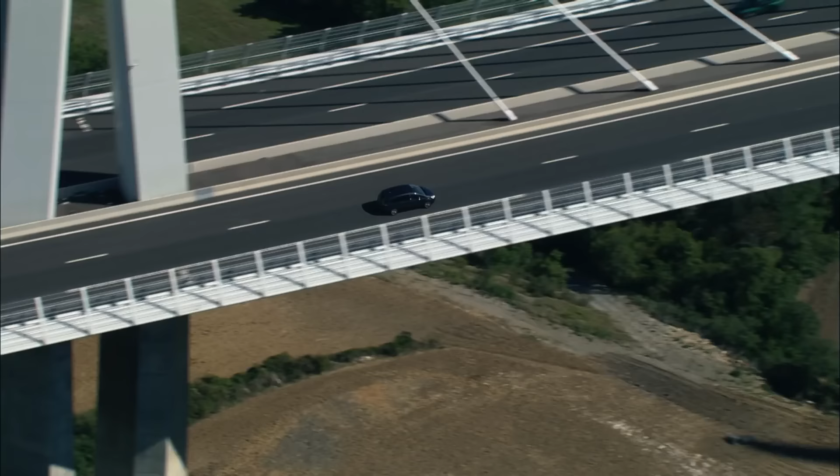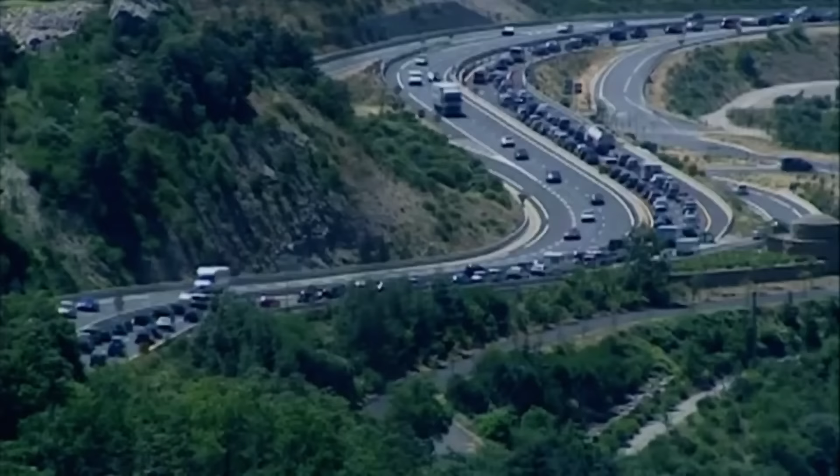Nestled in the southern corner of the Massif Central in France is the tranquil medieval town of Millau. However, for decades, every summer, that tranquility was shattered. Lying directly in the path of the fastest and busiest transport link between Paris and the Mediterranean coast, this historic town became a traffic nightmare.

Millau is not at all adapted to the motorway traffic. When the traffic from the tourists coming back from vacation in July, and the other one coming down in August, it could be necessary to have 3 hours to cross Millau.

Finding a solution would become the engineers' biggest challenge for the Millau Viaduct. To bypass the town and unblock this vital route across Europe, they would need to achieve what was previously thought impossible: build a road across the gargantuan Tarn Valley.

The first difficult point was to select where to cross the valley, because there is almost 300 meters between the plateau and the deep part of the valley. There have been big debates at the time, many alternatives were analyzed. Finally, it was decided to fly over the valley.

To achieve this extraordinary feat, engineers created a masterpiece: the Millau Viaduct.

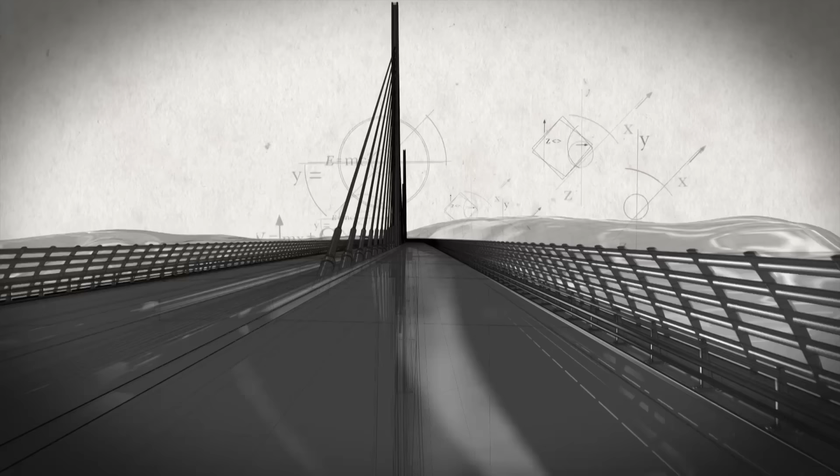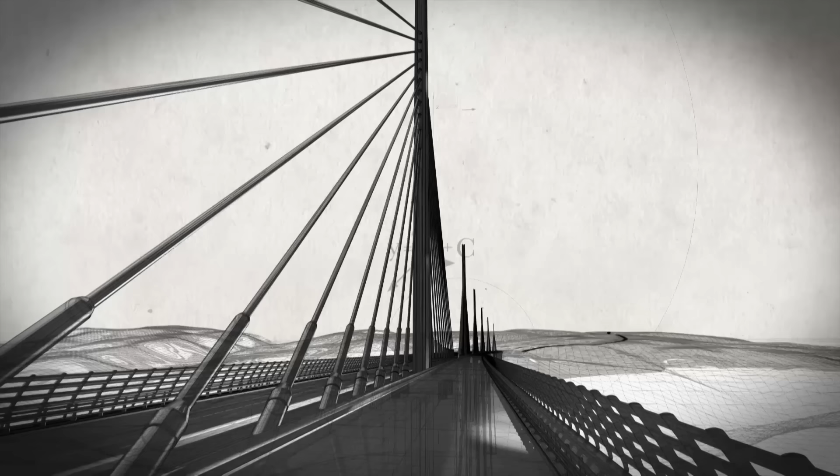Spanning a staggering 2.5 kilometers and towering 343 meters above ground, it is the tallest bridge on the planet. Touching the Tarn Valley floor only 7 times, the slender concrete piers support a 36,000-ton aerodynamic steel deck, held audaciously in place by a single row of 154 super-strength cable stays.

Completed in 2004, this magnificent sky bridge has pushed modern architecture and engineering to its limits. Many thought it was impossible to build that bridge, and there have been many controversies on the bridge type. So much controversy that in 1996, an international competition was launched to find the solution. The prize was awarded to architect Lord Norman Foster, alongside the engineers of the Millau Viaduct.

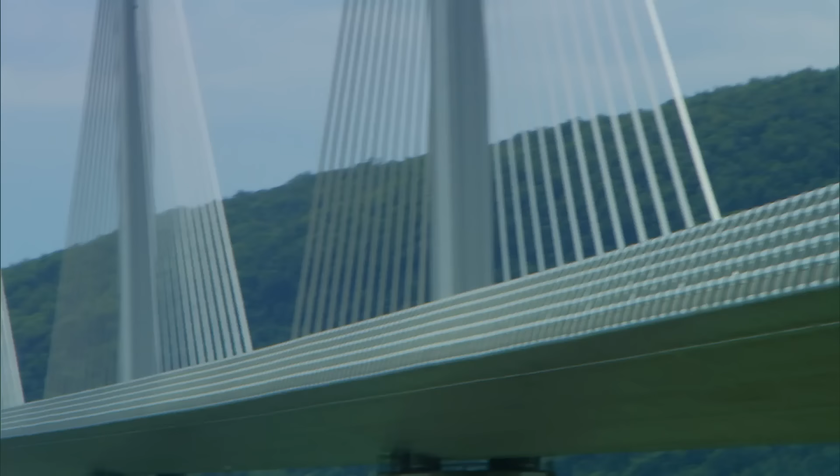Each new bridge is a new challenge, a new project, and must be designed very specifically. In this case, we had a very important series of problems to solve.

Not only did the bridge have to span one of Europe's deepest and widest valleys, but rest on an uneven valley floor and be subjected to extreme wind forces at deck height. But perhaps the biggest challenge of all, it had to be completed in less than 4 years and built to last.

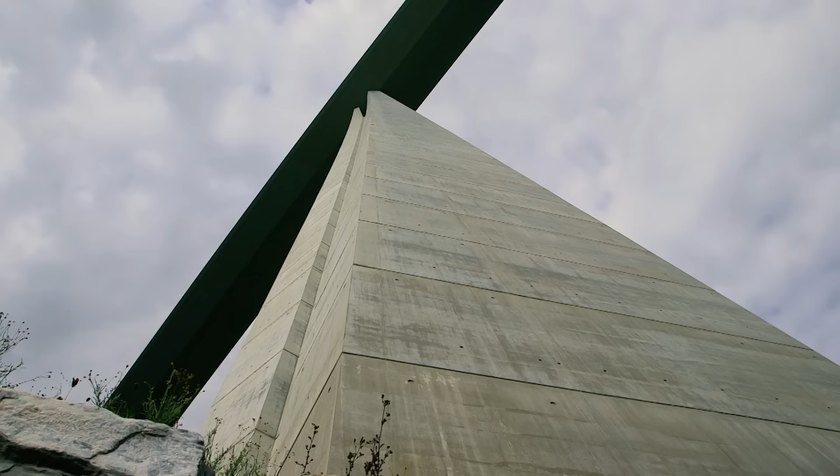What is very important is to give the durability to the bridge. The contract specifies that the lifetime of the bridge is 120 years, so it's something very important.

So how do you create such a colossal bridge of extreme strength in record time? Engineers first needed to choose the right materials, a task that would not have been possible without the great innovators of the past.

Man's earliest building materials were sourced from nature. Neanderthals built shelters from the bones and tusks of woolly mammoths, usually when the mammoth had finished with them.

For thousands of years, Mongolian nomads have used sheep wool to line the walls of their yurts. Although not everyone's happy about it.

From the time of ancient civilizations, many houses have been built with straw and clay bricks, reinforced with a touch of animal dung, which works perfectly, if you're standing in the right place.

But to create a truly enduring structure, engineers at Millau would look to the work of a pioneering British civil engineer a quarter of a millennia earlier.

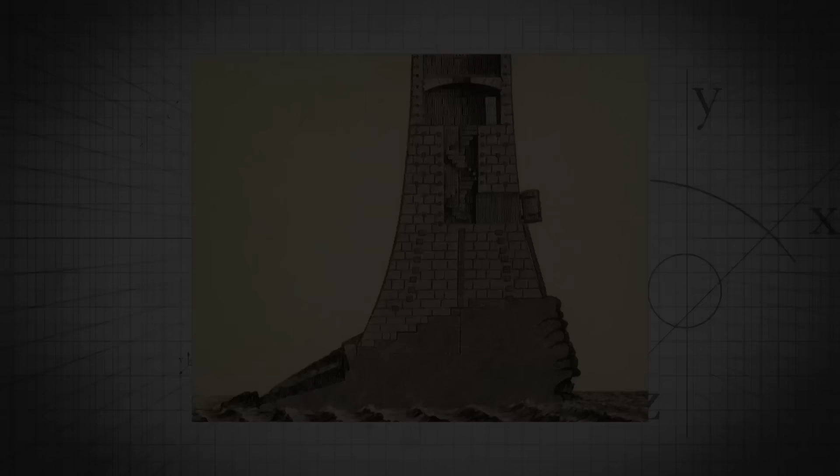In 1756, this seemingly impossible challenge fell to engineer John Smeaton. He believed that the sea must give way to the building, and decided to build a lighthouse made of stone. But it was how he joined the stones together that was truly revolutionary, and earned him the title father of civil engineering. Smeaton's original lighthouse stood on this spot for over 120 years, and we can still see the bottom half of it as that stump of a lighthouse over there. The structure had been so strong, it was only cracks in the rocks that it sat on that forced engineers to dismantle it.

And the secret of its success had been an innovative bonding material that could survive the constant pounding of the sea. Smeaton experimented with mixtures of lime, clay, and iron slag to create hydraulic lime.

I'm going to try to demonstrate the innovation that Smeaton accomplished at the tower. Here we have a traditional cob mortar, a mixture of sand, clay, straw, lime and a bit of earth. These types of mortars were used traditionally for many hundreds and thousands of years. The other material I have here is Smeaton's mixture.

Smeaton's hydraulic lime is formed inside a cardboard tube before being placed in water, replicating the rigors of the sea. I'm also going to do the same with the traditional earth mixture. Got both tubes now filled with the mortar. We're going to go away for about half an hour, and then come back and hopefully see a pretty dramatic difference in terms of how they've performed.

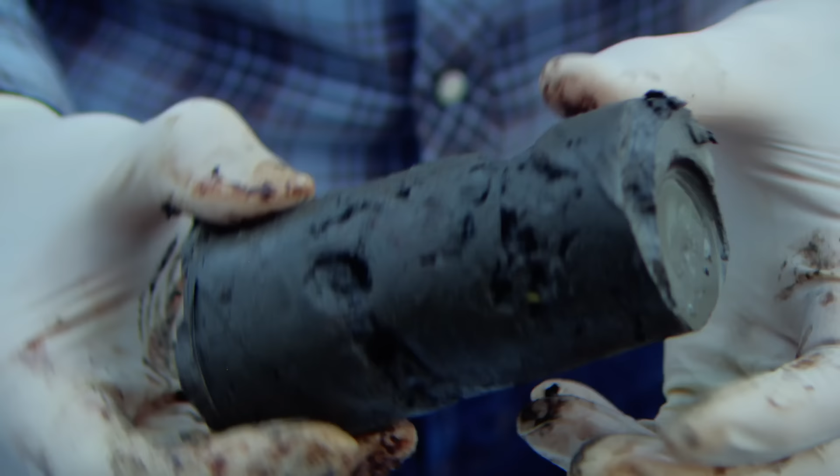What Smeaton had created was the precursor to Portland cement. Portland cement is the key ingredient in all modern concrete.

The strength of Smeaton's hydraulic lime allowed engineers to dovetail together nearly 1,500 blocks of granite, creating a rock-solid structure that would stand up against the forces of nature. So solid, in fact, the Victorians found it too difficult to dismantle the base when it was finally relocated to Plymouth Hoe over 100 years ago.

So here we have the original 250-year-old granite blocks reassembled here on Plymouth Hoe with mortar, much like the original. Incredible that it still looks so good. And if I look really carefully, way out there on the horizon, I can just see the base of Smeaton's original tower standing next to the new tower. This was really the game changer in concrete engineering worldwide.

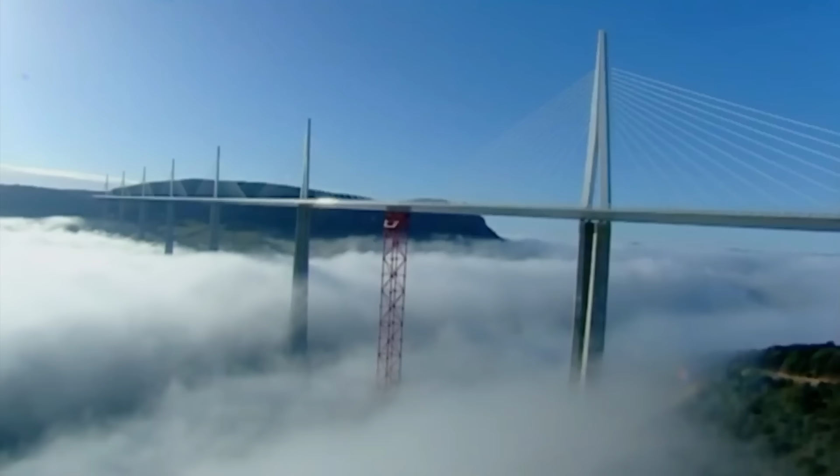At the Millau Viaduct, engineers enhanced Smeaton's groundbreaking formula to create a technically sophisticated form of modern concrete and used it on a gigantic scale, building 7 of the tallest bridge piers on Earth. All the piers represent something like 90,000 cubic meters, or more than 200,000 tons of concrete. And this is a concrete of very high strength.

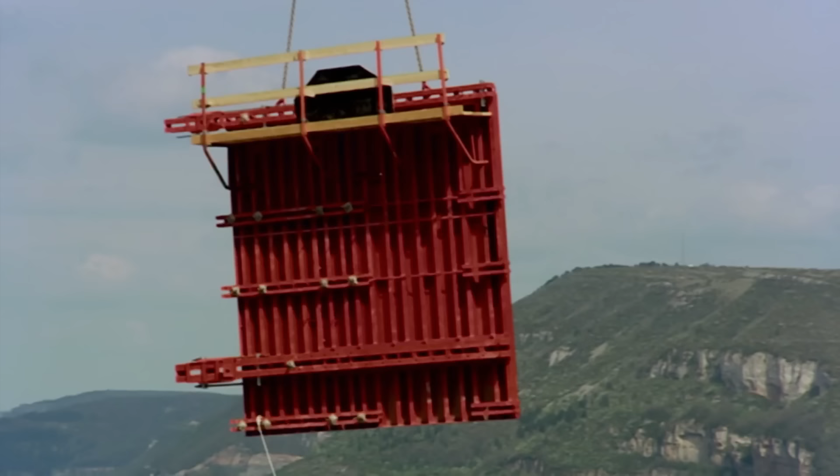But for the Chief Engineer of the Millau Viaduct to hit the 4-year deadline and avoid fines of up to $30,000 per day, each pier had to be built simultaneously at 7 individual work sites. Due to their extreme height and complex shape, radical engineering techniques were called for. From here we can see the shapes of the piers — they look very simple, but it's very far from it.

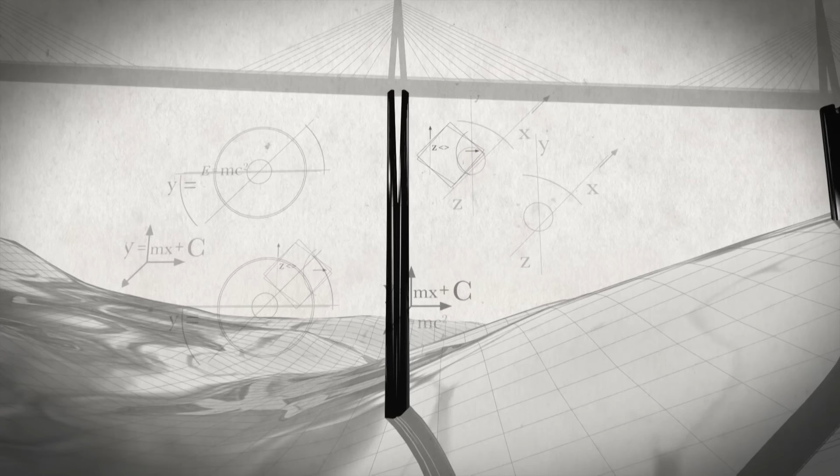Engineers broke ground in October 2001. Across the uneven valley floor, each pier had to be a different height, the tallest a record-breaking 245 meters. Their octagonal shape tapers gradually, splitting 90 meters below deck height to provide greater flexibility.

It was necessary that the architect worked to make nice piers, but at the same time, it was necessary to select shapes which could be erected with self-climbing forms.

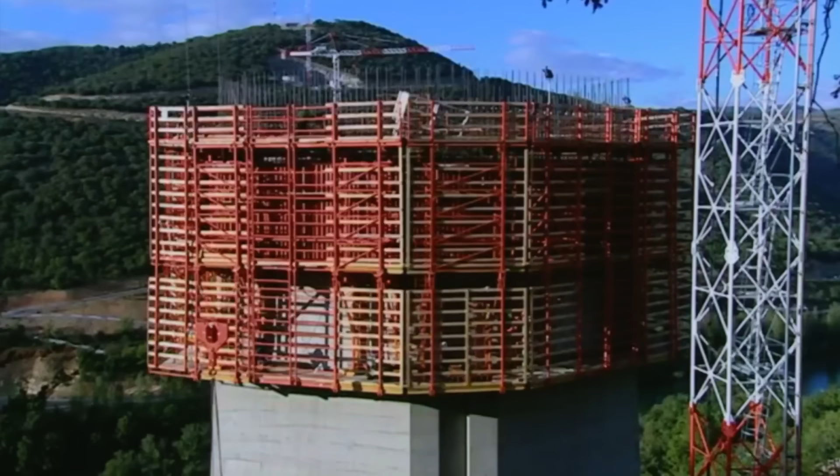Built in 4-meter stages, engineers used a state-of-the-art self-climbing frame, a hydraulic-driven system that would push a giant reinforced concrete mold upwards. One of the big problems was to lift concrete, because this pier is 245 meters high. Cranes were used to lift buckets of concrete, which was then poured into the concrete mold.

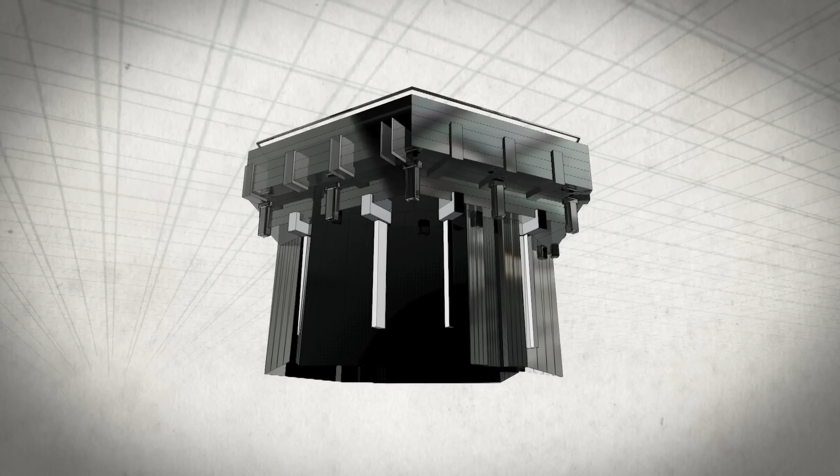After each pour was set, the mold was dismantled. The frame carrying the mold was then mechanically pushed by hydraulic jacks up the piers and re-anchored in the set concrete. The mold was then reassembled, ready for the next pour. In total, each cycle took 3 days.

You can see the lines between the different concrete lifts, and also the traces of the elements where the climbing forms could be anchored to the concrete.

The piers were completed in just over two years, one month ahead of schedule. Developing solutions to erect the seven piers in the same time was a very, very big adventure.

But to complete the planet's tallest bridge on time, designers would again look to history's great innovators.

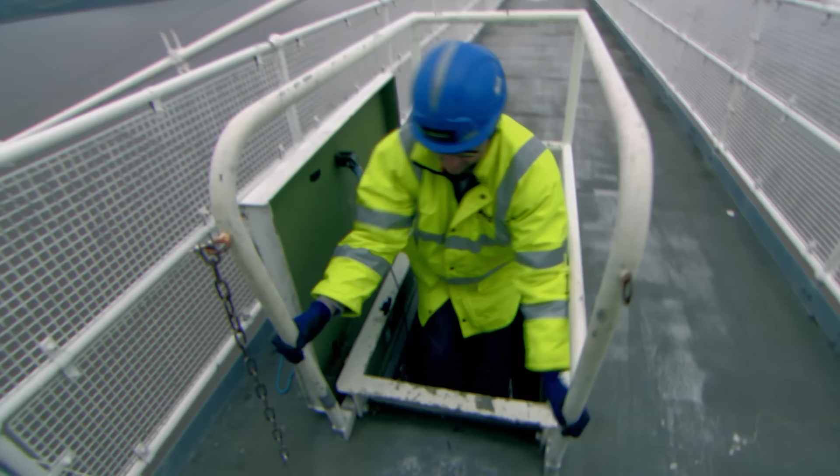The Millau Viaduct in southwest France is an engineering wonder of the modern world. When it was decided to place the structure to the west of Millau, it was necessary to design a very big bridge to cross the valley.

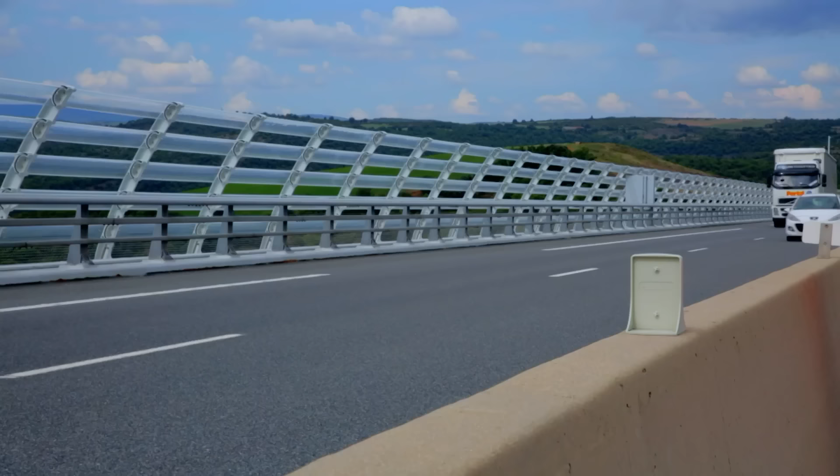Spanning the yawning abyss of the Tarn Valley at 343 meters high, this supersized bridge stands taller than any other on Earth. But during its construction, its jaw-dropping height created a seemingly impossible challenge for the chief engineer of the Millau Viaduct.

The solution is to reduce the wind force. But diminishing the effects of the wind's tremendous power on the bridge deck would not have been possible without another ingenious innovation from the past.

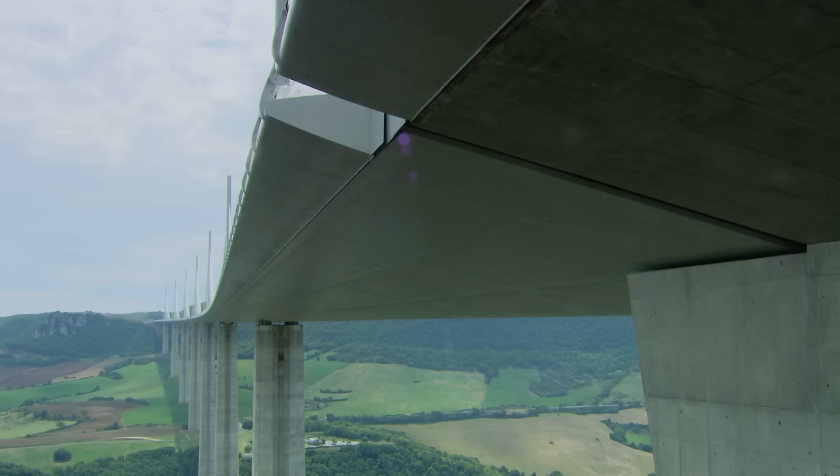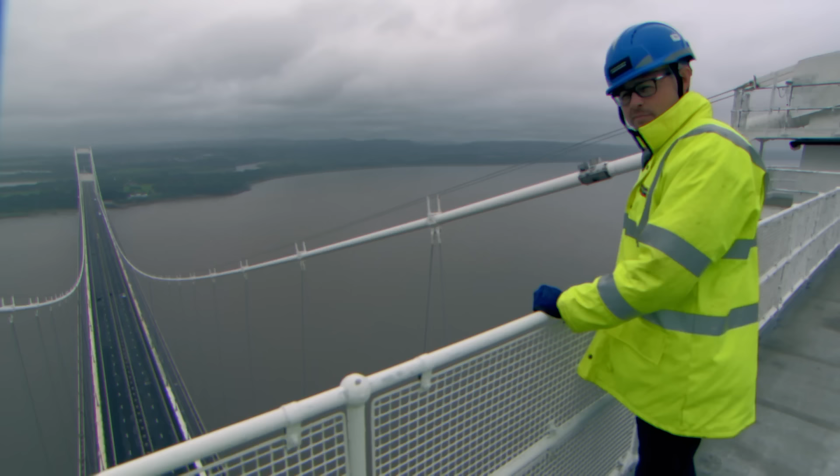Professor Luke Bisby is exploring one of Britain's most iconic bridges. All right, now this is what I'm talking about. A vertigo-inducing 135 meters below me lies the Severn Bridge.

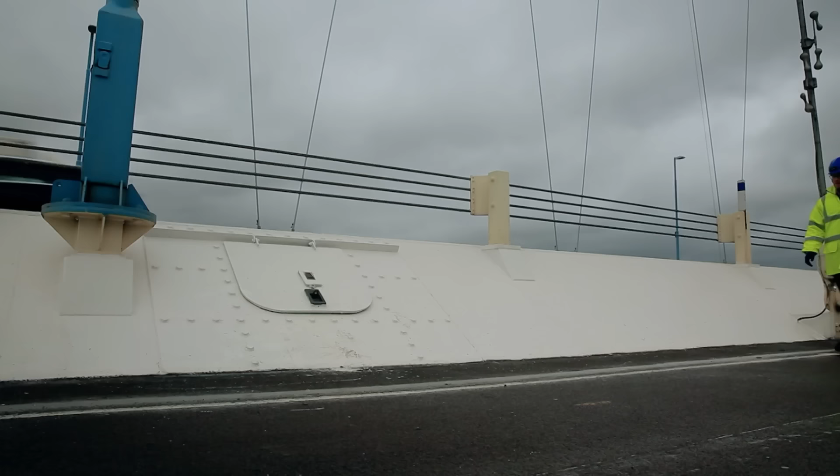Opened in 1966 and spanning the River Severn between Aust and Chepstow, it was the first major road link between England and South Wales. The main section of the bridge is over 1,598 meters long, which at the time made it the longest bridge in the world.

I can actually see through this hole about 1,000 meters down the bridge. It's absolutely incredible.

But whilst the length of the bridge was an incredible engineering challenge in its day, it was the weather that posed the greatest problem of all.

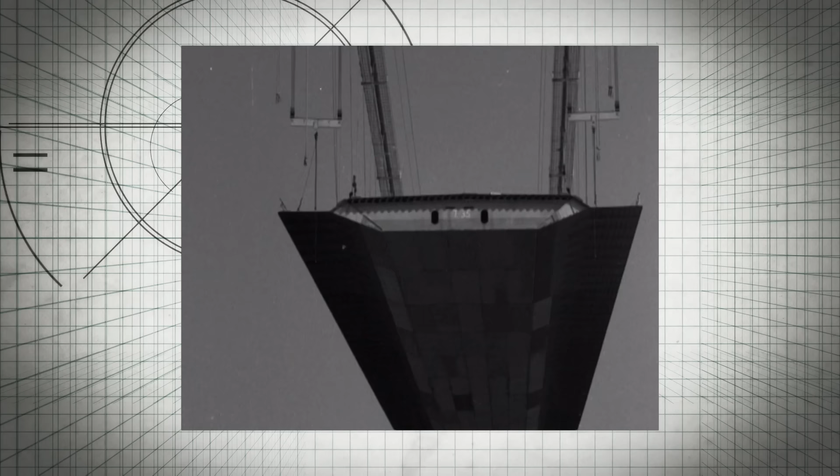Lying inland from the Atlantic Ocean, the River Severn begins where the Bristol Channel ends. The high ground of Exmoor on the south shore and the mountains of Wales on the north create a funnel for the prevailing southwesterly winds and Atlantic storms, increasing their power.

Building a bridge that could withstand severe winds was really essential. And even on a relatively calm day, standing here underneath the bridge, you really get a sense of the wind that they were up against.

During the 1950s, pioneering British civil engineer Sir Gilbert Roberts was tasked with designing the longest windproof bridge on Earth.

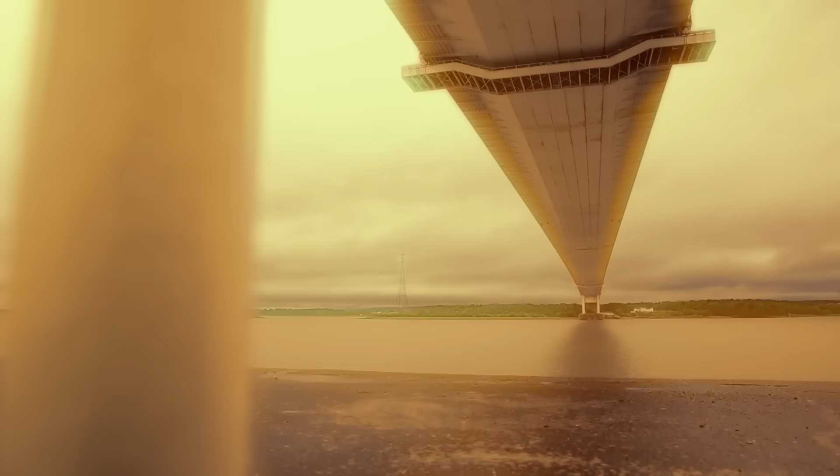And the biggest challenge was the deck itself. If you look at the shape of the deck, you can start to get a sense of what the solution was. And the most amazing thing is that the shape of this bridge deck and the solution they came up with was actually a happy mistake.

When testing the original truss lattice design in the wind tunnel, the model broke. Awaiting a replacement, engineers became inspired by other aerodynamic shapes, which led to a truly groundbreaking idea.

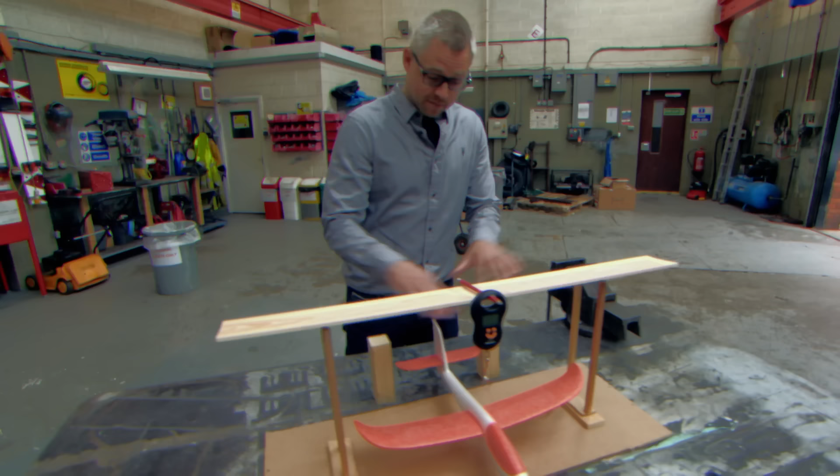So what I have here is a model airplane, and you can imagine that the wing of this airplane represents the bridge deck. A wing has a curved surface on top and a flat surface on the bottom, meaning air passing over the wing has to travel further across the top than on the bottom. As air passes over the curved surface, it speeds up and loses pressure. The pressure of the air below remains high and pushes up towards the low-pressure area, creating lift.

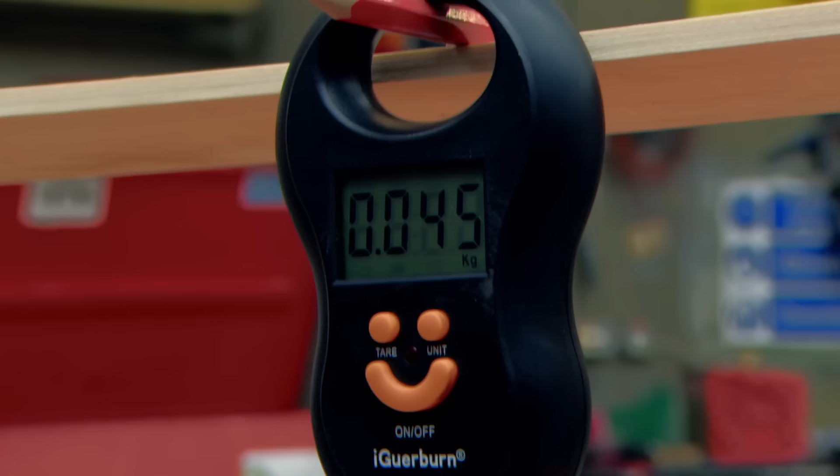What I'm going to attempt to show you is, with this hairdryer generating some wind, the force of the little model airplane will decrease, and that decrease will signify the lift force we've generated on the model. So there we have our starting weight, 45 grams. Right, so there we go.

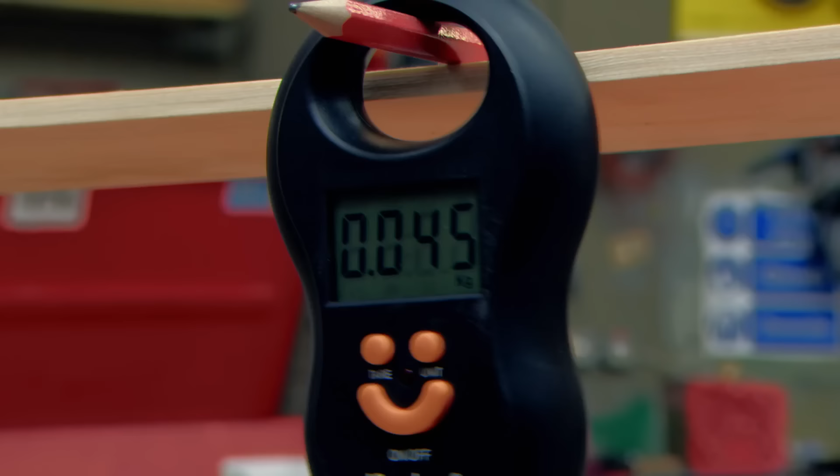The engineers here didn't want that to happen to the bridge deck. However, if the experiment's repeated in reverse, the effect for the deck is beneficial. What we should see is that this force should increase rather than decrease.

You can actually see the downward force that's coming from the wind. That holds everything nice and taut and safe in very strong winds. Now the curved surface is underneath, air loses pressure as it speeds up, and the high pressure above presses down.

And of course, this is exactly the principle that the engineers used on the Severn Bridge. Sir Gilbert Roberts and his team created an aerodynamic steel box girder deck, the first of its kind in the world. Hollow and only 3 meters deep, with a cantilevered footway on each side, the deck is able to create a wind flow which holds it firmly in place.

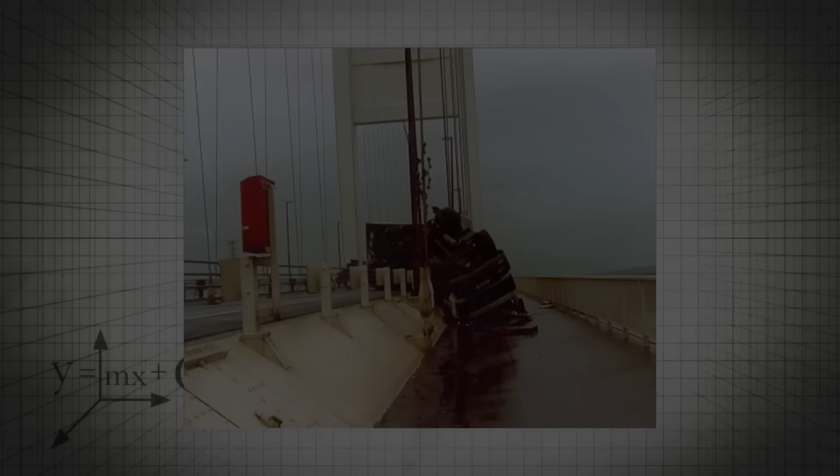During its history, 13 vehicles crossing the bridge have blown over, but the bridge itself stays solid. Although this beautiful bridge has passed on the burden of heavy traffic to its younger brother just downstream, it's still managed to carry more than 300 million vehicles since it was first constructed in 1966. And thanks to Sir Gilbert Roberts and his team, it's set to do so for many more years to come.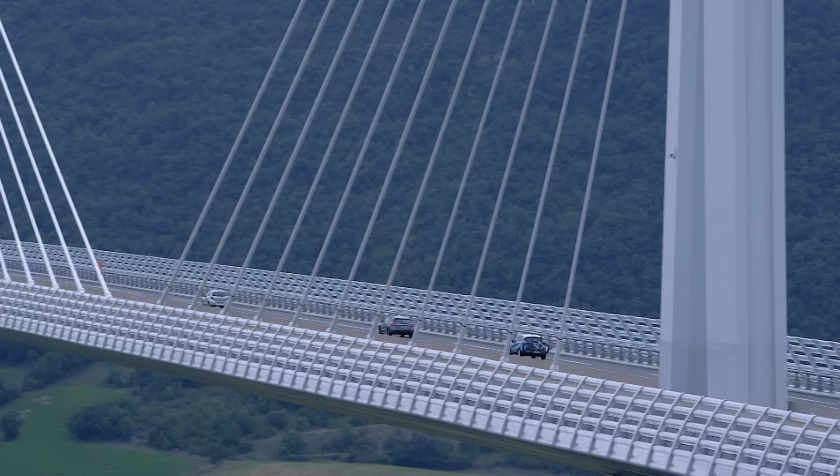Engineers at the Millau Viaduct have advanced Sir Gilbert's inspired aerodynamic shape and created a cutting-edge bridge deck of their own.

One kilometre longer than the Severn Bridge, at 2.5 kilometres and weighing a colossal 36,000 tonnes, it's one of the longest cable-stayed bridge decks on Earth.

The deck is streamlined, meaning it's rather shallow, at 4.2 meters. In addition, it has a continuous shape with very limited inclination, which helps the wind pass below and automatically reduces wind forces.

The deck is a shallow trapezoid shape, creating an inverse aerofoil to provide negative lift in strong winds.

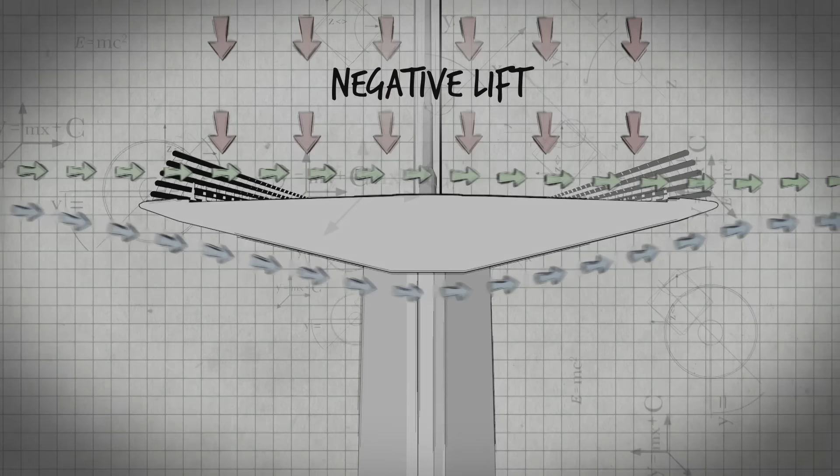But building this colossal seamless aerodynamic steel deck in record time was an unprecedented challenge. So engineers decided to create a gigantic steel jigsaw puzzle, cut in dedicated factories across France and transported to Millau.

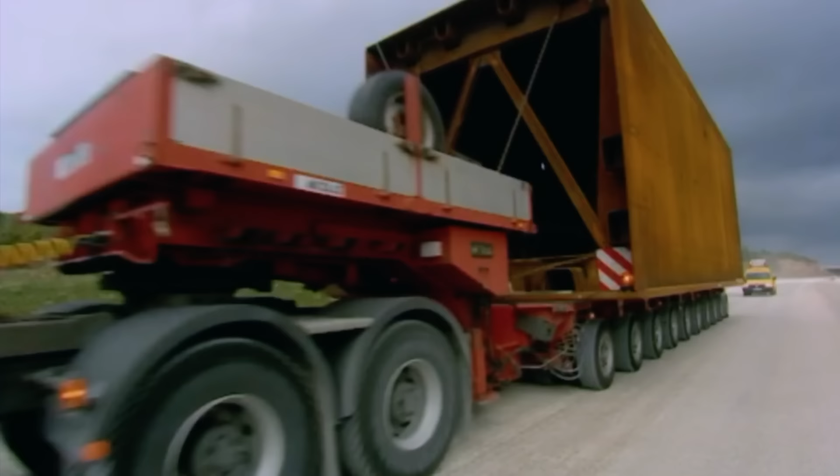The central core, which could be considered the spine of the bridge, was assembled in segments of 20 meters and brought by trucks to the site. The deck was assembled on the hills on each side.

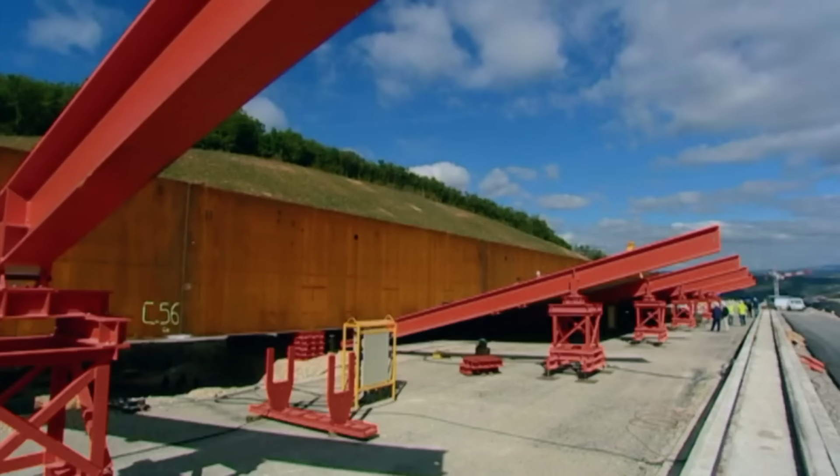Two work sites on each plateau were set up to receive the component deck parts. In all, 2,000 convoys loaded with cut steel travelled to Millau.

The welding was completed in just 20 months, using a staggering 150 tons of welding material.

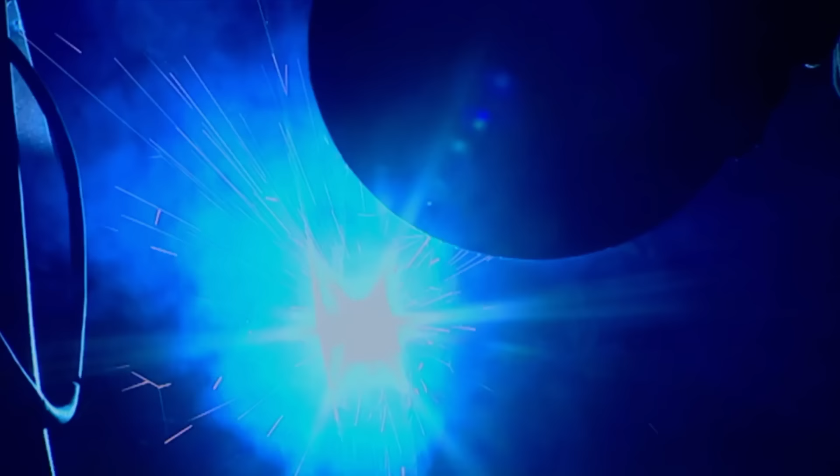But engineers at the viaduct were yet to face their greatest challenge. One of the big questions was how to launch the bridge from both sides of the valley, and it was not so simple to do that.

To span the huge chasm of the Tarn Valley, engineers would once again turn to the work of historic innovators. All of these harness the properties of a revolutionary product, to make the impossible possible.

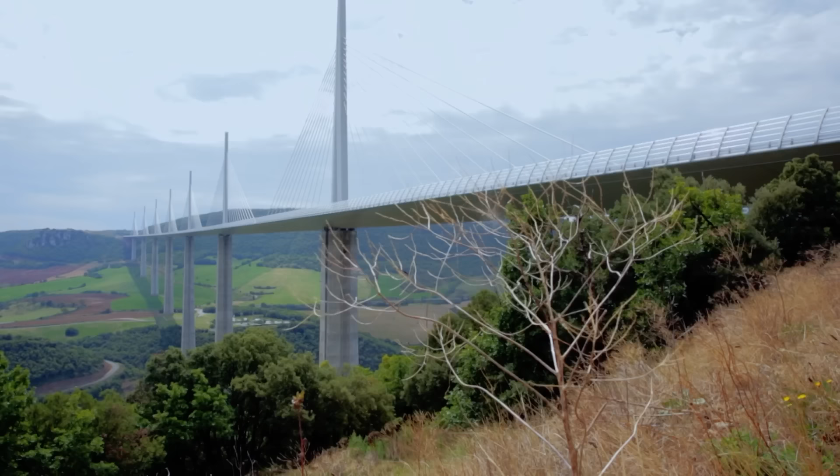The Millau Viaduct in France's Massif Central is a work of engineering virtuosity. Taller than the Eiffel Tower, this bridge once seemed an impossible dream. Conceived by the Millau Viaduct's engineer, the project pushed the boundaries of construction.

It has been very difficult. The solution was not immediate. We had to work a long time to solve the problems, and it was a big challenge.

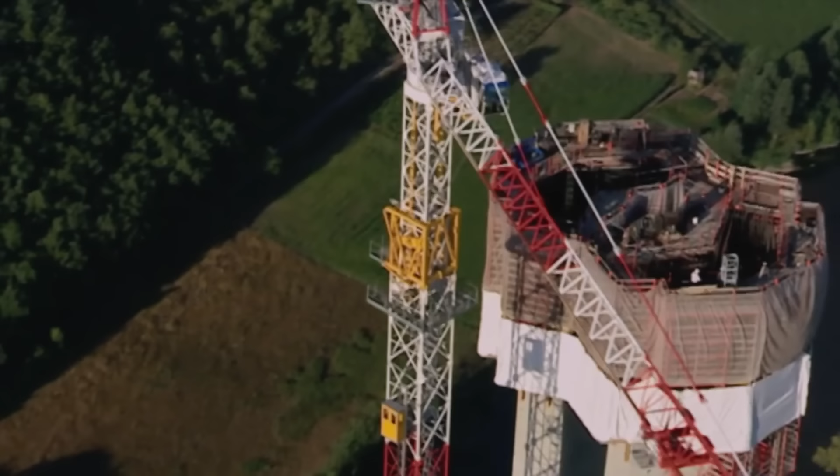Perhaps the biggest problem to overcome was to place the 2.5-kilometre steel deck on top of the concrete piers. Their extreme height ruled out using a crane. The only option for engineers was to try to slide the two sections of deck from each side of the valley.

The piers are so slender that classical launching techniques would have been very critical. It would not have been possible. The leading edge of the deck weighs 7,000 tons.

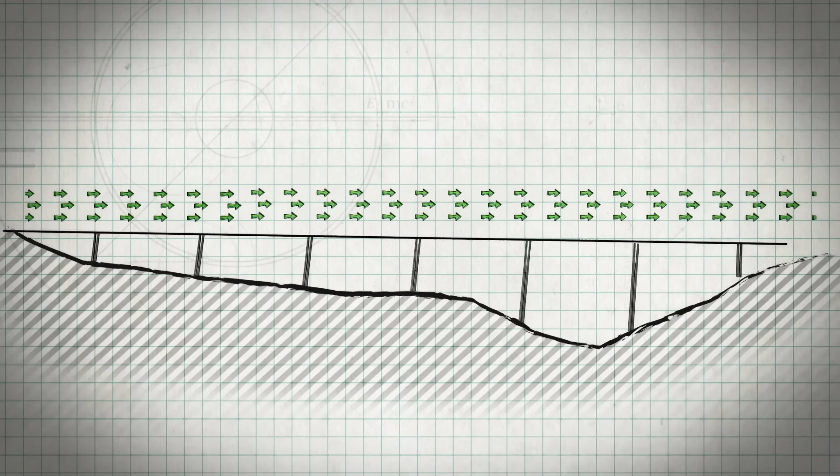The pier's great height-to-width ratio meant that they were susceptible to lateral forces. Pushing the deck across the pier's surface would create friction, increasing the lateral force, with potentially disastrous consequences.

To solve this seemingly impossible challenge, Michel and his team at Millau would need to reduce friction throughout the launch process, a task that would not be possible without the ingenious engineers of the past.

Friction has been a sticking point for man for thousands of years. Ancient Egyptians, struggling to slide their building blocks across sand, realized water created a smoother, slipperier surface.

Although too much was not advisable. It's thought the builders of Stonehenge rolled their giant slabs across a series of logs, which was the perfect solution, as long as the ground was flat.

But luckily for engineers at Millau, a scientific mishap made in a US laboratory during the 1930s would provide a solution.

Engineer Rhys Morgan is getting to grips with this accidental discovery that revolutionized the way we live. Most people will recognize these day-to-day objects, but what most people don't know is that all of these harness the same properties of a revolutionary product called PTFE, or to give it its full name, polytetrafluoroethylene.

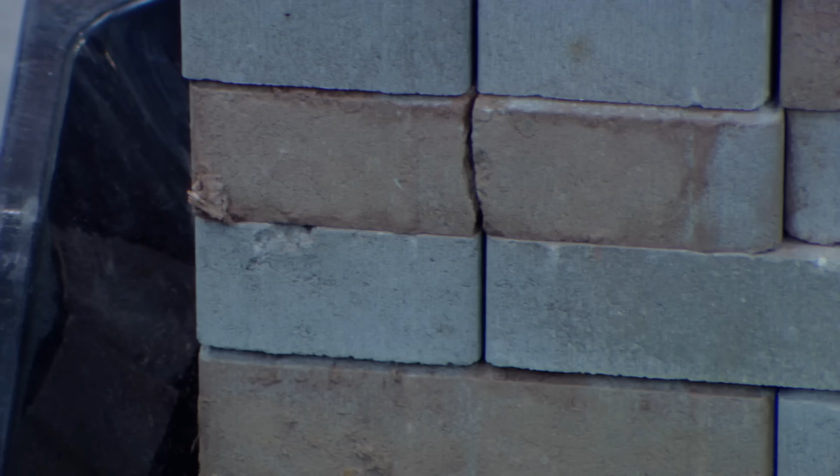It has lots of different properties. It's very corrosion resistant, it's chemically inert, it doesn't react with other materials, and it has a very high melting temperature. But above all of these, it's very, very slippery. And being slippery means it's very adept at overcoming the forces of friction, a phenomenon that is hard to deal with for a standard metal.

So here I have a sled connected to a metal tray underneath with about 45 kilos of bricks and sand. As I pull the sled along, the tray is going to have a huge amount of friction against the metal sheet here, and that friction is retarding the motion.

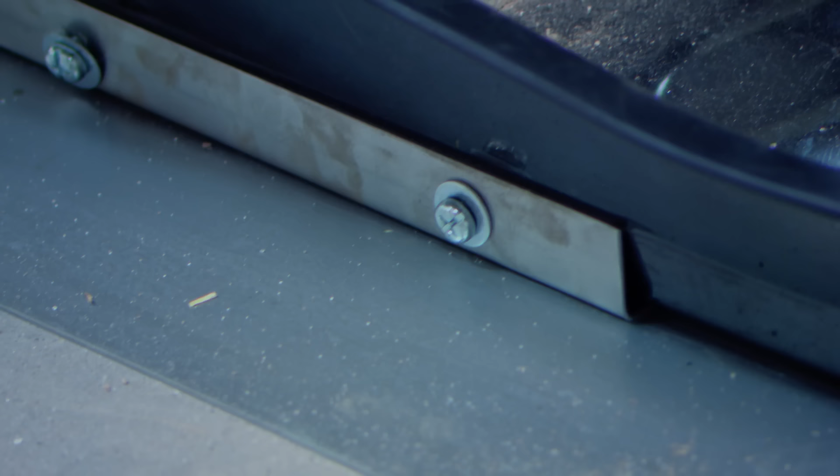As I start to pull against this now, you can see I've got 5 kilograms and I've still got no movement. That's the friction preventing my sled from moving. I'm up to 7 kilograms, 10 kilograms, 11, 12, and there it goes. So that's about 120 newtons of force to pull those along.

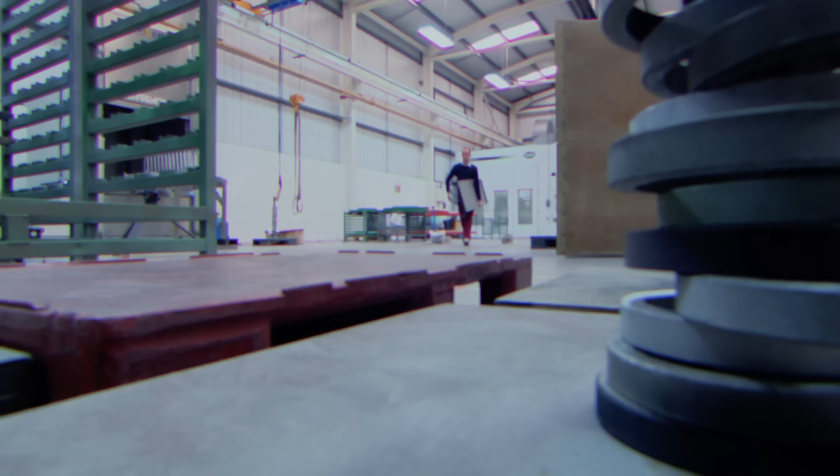To see how PTFE performs, the metal tray is prepared, then sprayed with the slippery coating and cured at 430 degrees Fahrenheit. Wow, look at that. That looks incredibly smooth. So let's give it a go.

I've got 2 kilograms, 5, 6, 7, and look, it's starting to move already. 7 kilograms here to overcome the friction. And you compare that to 12 kilograms, that's 120 newtons. So that's about 50 newtons difference to move the same amount of weight.

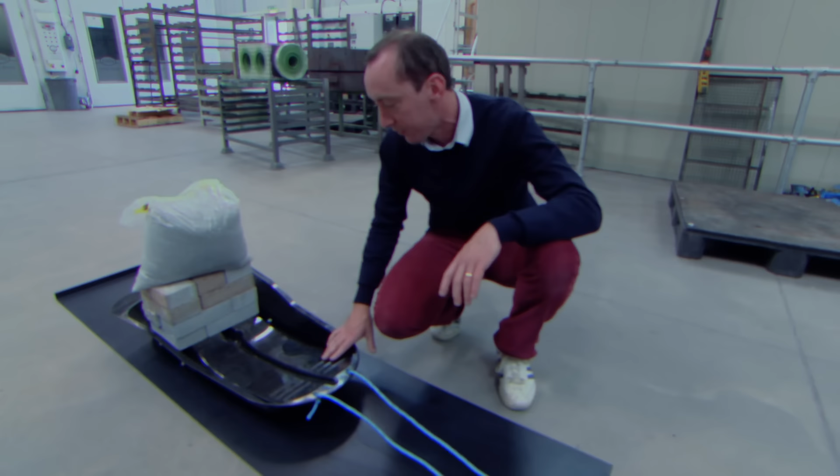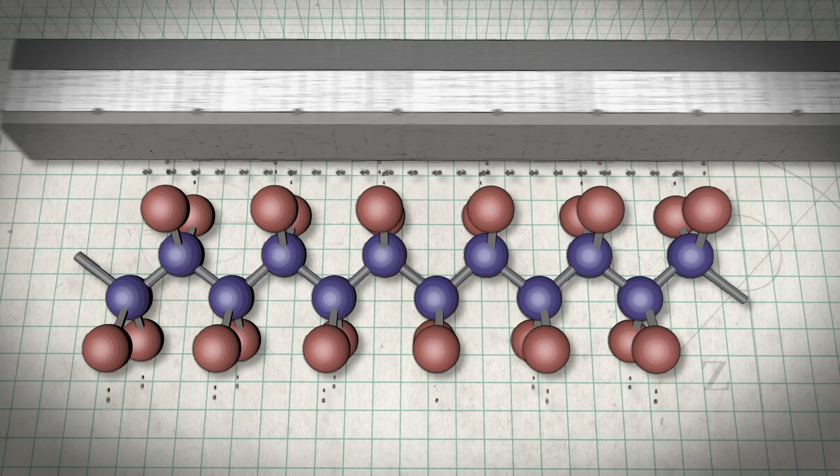PTFE is made solely of carbon and fluorine atoms. Fluorine has the highest electronegativity of any element, repelling all other atoms. The fluorine wraps around the carbon, so it's unable to react to anything. As a substance, it is therefore highly unreactive and creates almost zero friction.

The sledge can carry up to 40% more weight when pulled across the PTFE-coated sheet, the equivalent of a 5'9" engineer. How much are we seeing? Wow, there you go, 12 kilograms, 120 newtons. How about that?

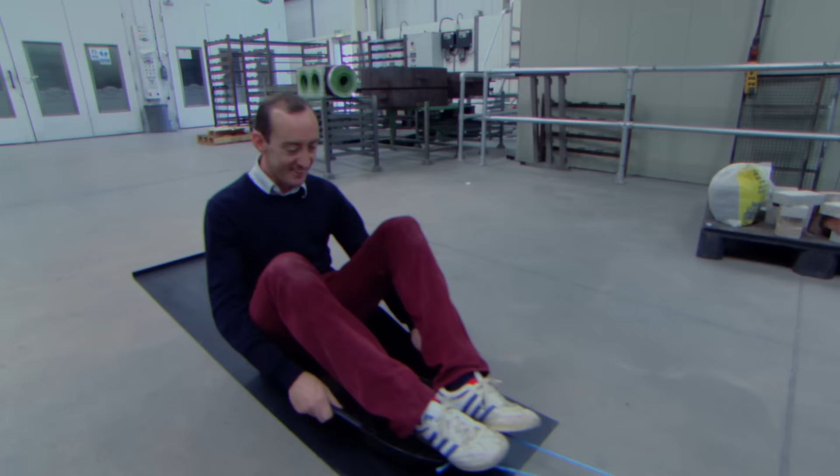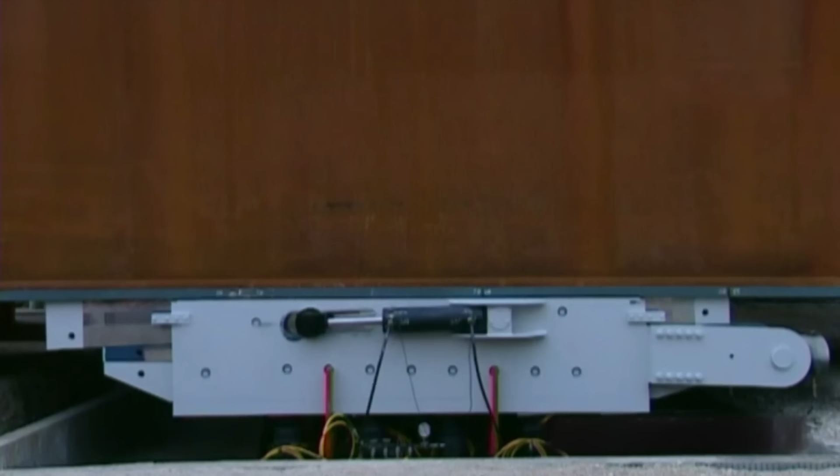Engineers at the Millau Viaduct took PTFE and incorporated it in a unique mechanism that would conquer the launching problem once and for all. It was necessary to create a system where the launching force was created pier by pier in such a way that no force, no bending was produced in the piers.

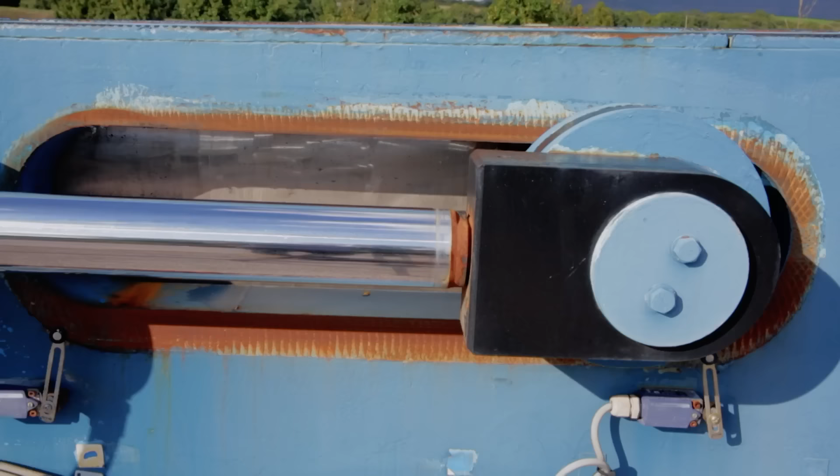To do this, the team created a translator, a machine that uses the slipperiness of PTFE and hydraulic jacks to lift the deck off each pier entirely before moving it forward. At this point, we have one of the equipment which has been used to launch the bridge. On each support, we had 4 of these machines.

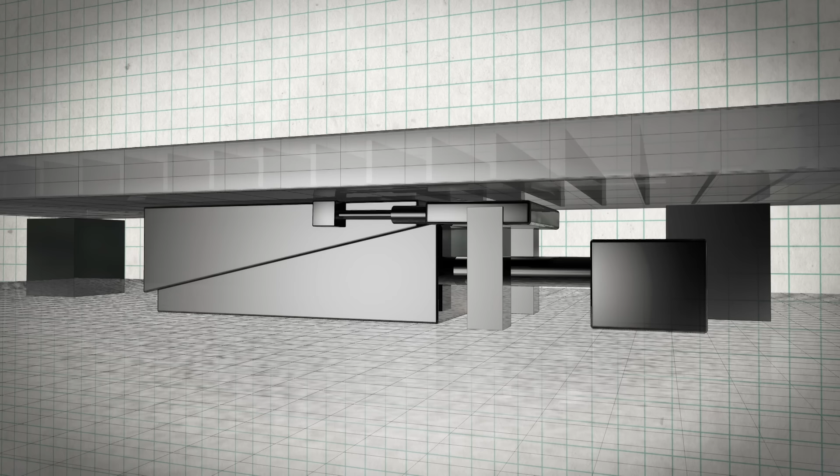Each translator uses 2 wedge-shaped blocks coated in PTFE. A hydraulic ram pulls the upper wedge, which slides it up the lower wedge. This lifts the deck away from the pier, pushing it forward at the same time. The lower wedge then slides backwards, lowering the deck back onto the pier. Each cycle moves the deck 600 millimeters.

All the launching systems are moving at the same time by the same distance, and so you can understand very clearly that it's not producing any force in the piers.

But before engineers could begin the launch, there was another problem. The typical spans are 342 meters long, but it's much too long to be crossed directly. So it was necessary to install in each span a temporary support, a big truss, in order to divide the span by 2.

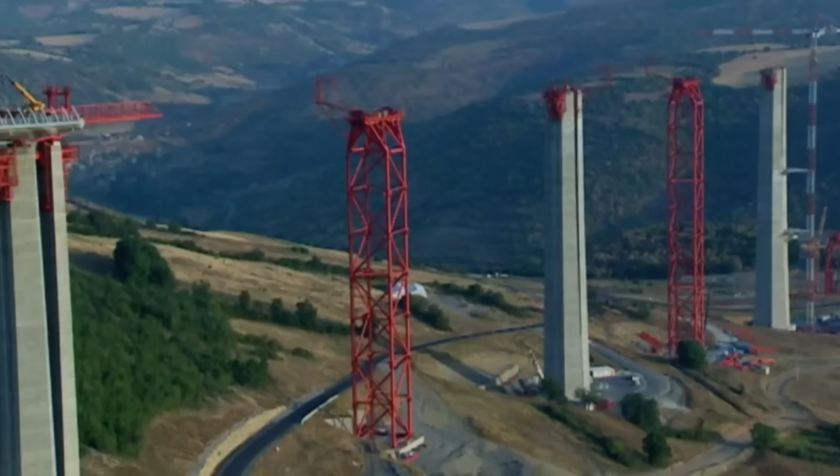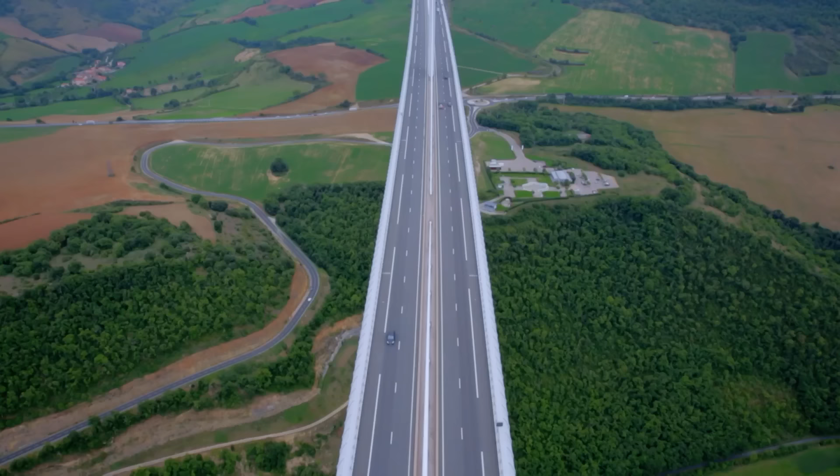7 temporary piers were built across the valley, and in February 2003, the launch began. But as the 2.5-kilometer deck was pushed out into the void, the course was not straightforward. Here, from the north abutment, we can first see the curve of the bridge. The bridge is curved with a radius of 20 kilometers, which is very, very large.

As the 2 colossal sections progressed their curved course from opposite sides of the valley, engineers had to rely on GPS technology to ensure pinpoint accuracy.

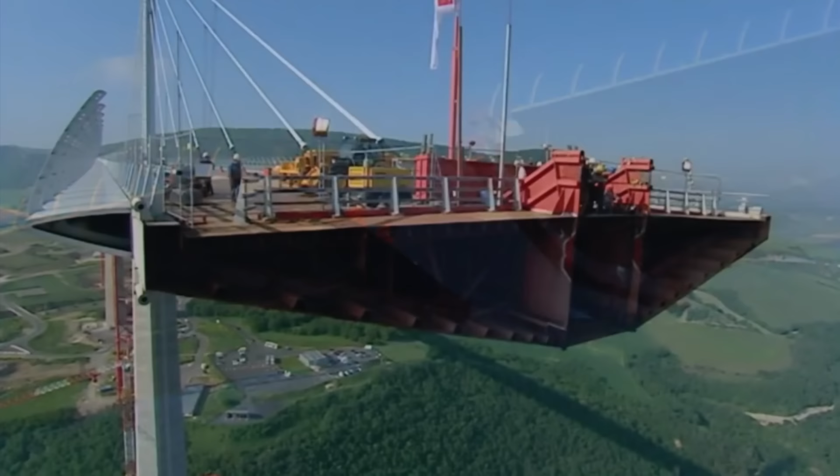And in May 2004, 15 months after they were first launched, the 2 sections of deck finally met above the Tarn River. Incredibly, they were only out by a few millimeters.

This system was really the key of the success.

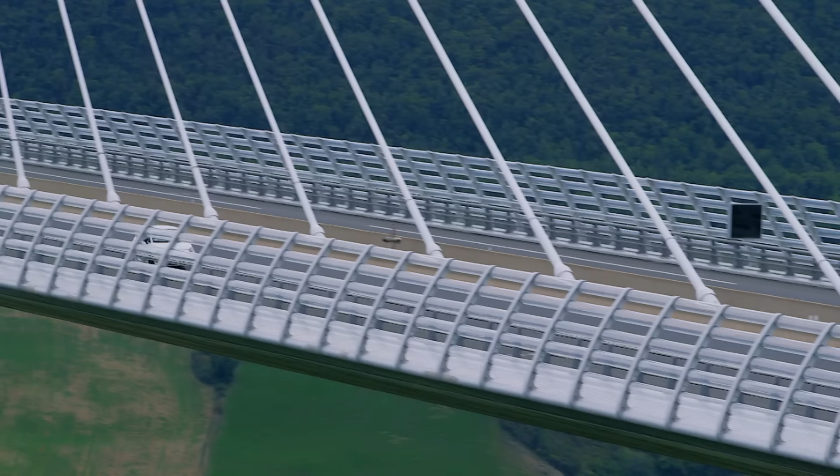But to complete this audacious bridge, the team at Millau would once more need inspiration from the great innovators of the past.

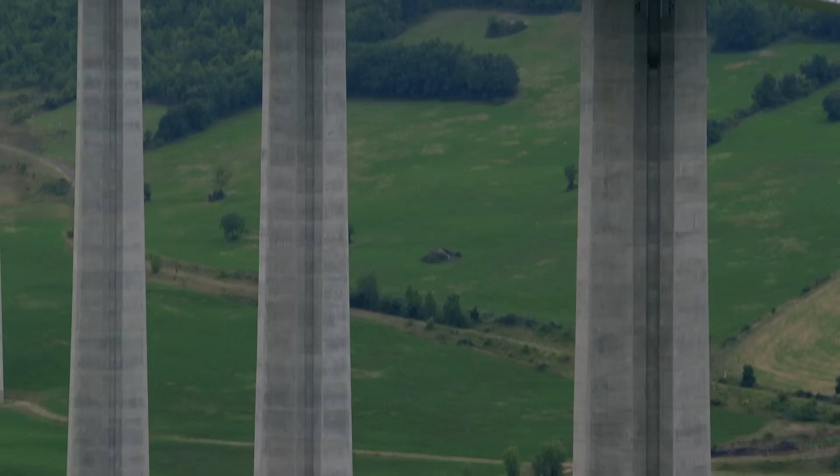Connecting the high plateaus of France's Tarn Valley is the Millau Viaduct. This audacious road bridge is the country's tallest structure and is one of the greatest engineering achievements of all time.

Conceived by engineer Michel Virlogeux and designed by architect Norman Foster, environmental considerations were key. The first thing to do was to preserve the quality of the site because it's a beautiful site.

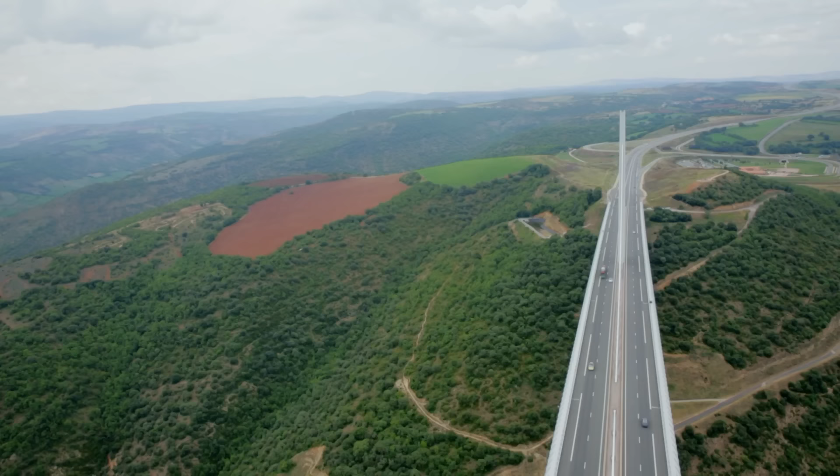The unstable limestone ruled out a suspension bridge, which relies on firm anchor points at each end to take the weight of the deck. For Millau Viaduct, there was only one solution.

I wanted to design a cable-stayed bridge because cables are very strong. They allow you to make very, very modern structures, very light and transparent. So from the beginning, I wanted to make a cable-stayed bridge with multiple spans.

Constructing a multi-span, cable-stayed bridge on such a huge scale in a hostile environment was considered an impossible challenge, one that could not have been overcome without the ingenious engineers of the past.

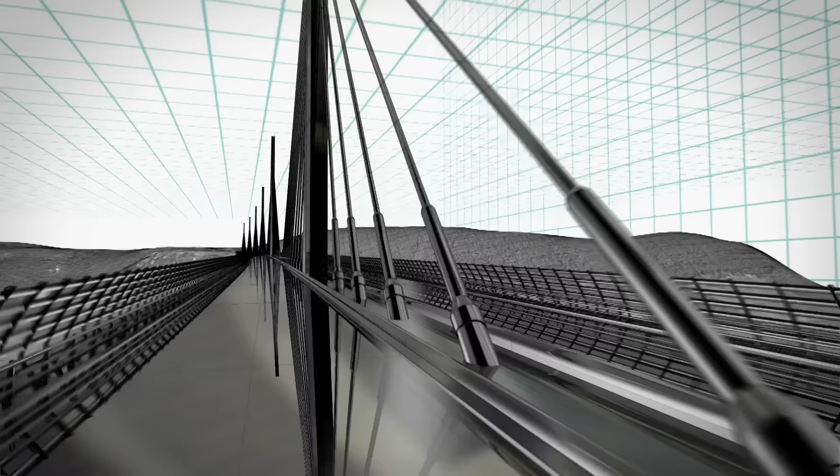Structural engineer Jonathan Ledin is paddling the great Ströms Vattudal in Sweden, searching for the source of an historic engineering breakthrough. For centuries, this stretch of river here in Strömsund has been an obstacle that travelers needed to overcome.

As cars became more commonplace by the early 1950s, it was decided a suspension bridge would be built. However, German engineer Franz Dischinger, who won the commission, proposed a different idea. A key player in rebuilding Europe post-World War II, where 15,000 bridges were destroyed, Dischinger's construction solutions were cost-effective and efficient.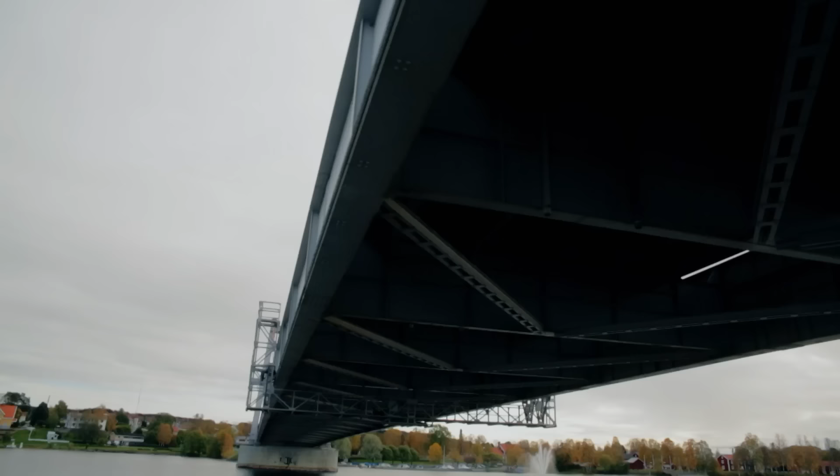What Dischinger built was this, the Strömsund Bridge. A cable-stayed design that has since been recognized as a landmark in engineering history.

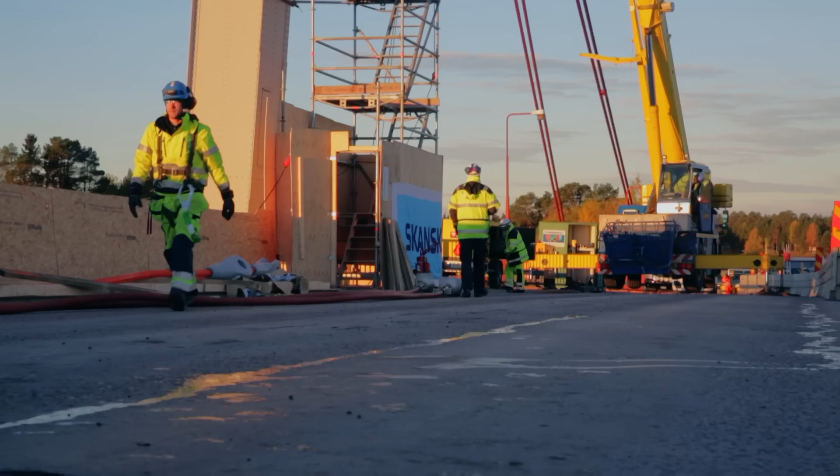After carrying vehicles for over 60 years, the supporting cable stays are being replaced for the first time. And it was Dischinger's approach to installing these cable stays all those years ago that was to prove so influential.

The way a cable-stayed system works is simple, yet very effective. Imagine my arms are cantilevering out from my body like this, and I'm trying to hold the buckets of water in place like this. I need to do a lot of work with my arms. This is not exactly easy to hold on to.

I'm going to use this rope here to represent the stay cables attached to the bridge deck, and I'm going to pull that over my head, which represents the piers. So now the majority of the weight is no longer carried by my arms, but through the cables onto my head and down to the ground. And that is exactly what is going on behind us. The weight from the bridge and the loads from traffic are being transferred through the cables and down onto the piers.

Early cable-stayed bridges, however, were structurally weak. Rudimentary cables and limited understanding of the forces at play in the system meant by the early 19th century, the idea was all but abandoned.

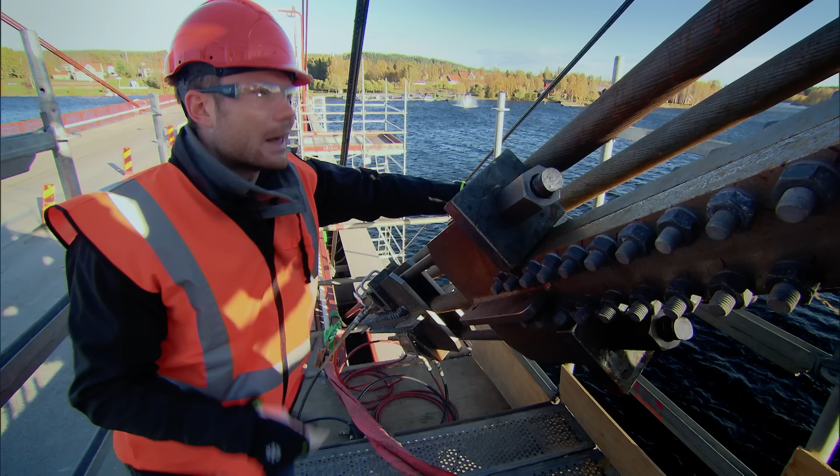The problem that the engineers were struggling with in the past was designing the cables so the loads would be distributed evenly among them. The consequences of one or more cables being overtensioned could potentially be disastrous.

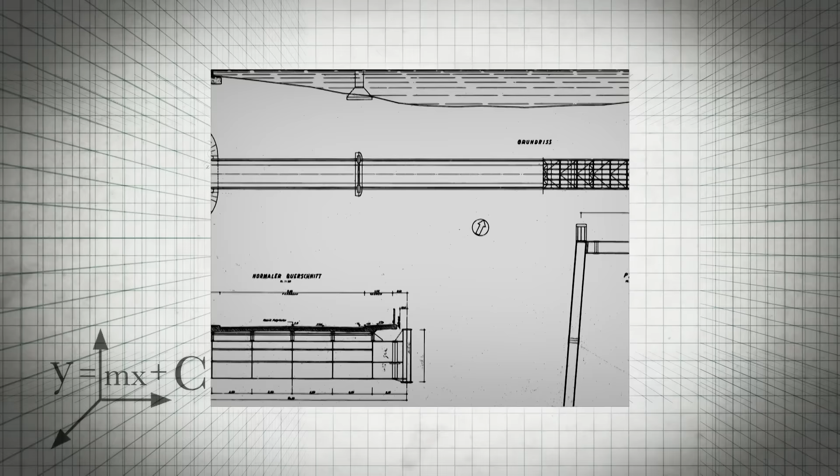To overcome this problem, Dischinger looked to mathematics. He created formulas to calculate the forces required of each cable. Each of those cables was then precisely tensioned on site, an engineering first.

Now they're being renewed using exactly the same process. So these are the brand new cables that are going to be installed overnight. And just as would have happened all those years ago, they're first going to be mounted in place and then precisely tensioned. Dischinger's innovative approach makes this possible to do in just a few hours.

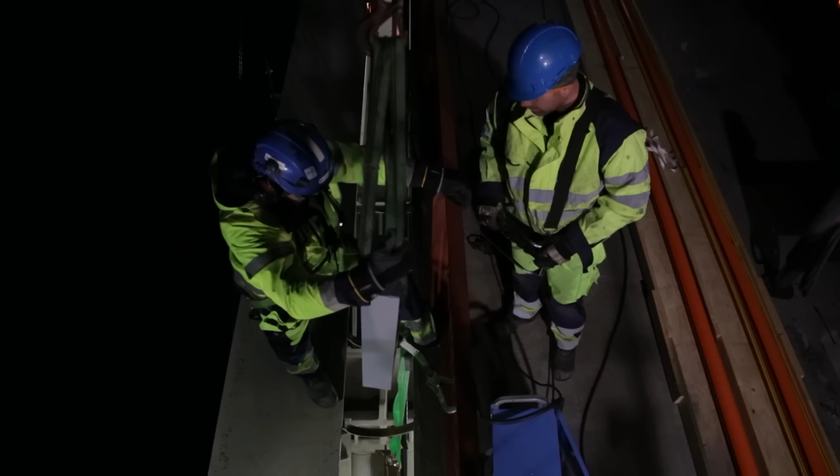Dischinger's pioneering construction technique has influenced some of the most iconic bridges around the world.

So the work has been going on here on site all night. And what's remarkable is the way in which all of this is being done is really not that different from what would have taken place here all those years ago.

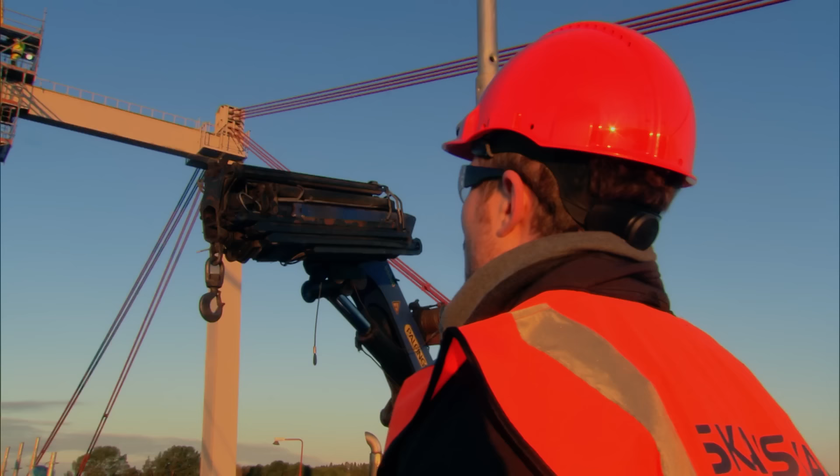So today, the Strömsund Bridge is considered the first true modern cable-stayed bridge and the real landmark breakthrough in the world of engineering.

Engineers at Millau have taken Dischinger's methods and magnified them, and created a structural masterpiece.

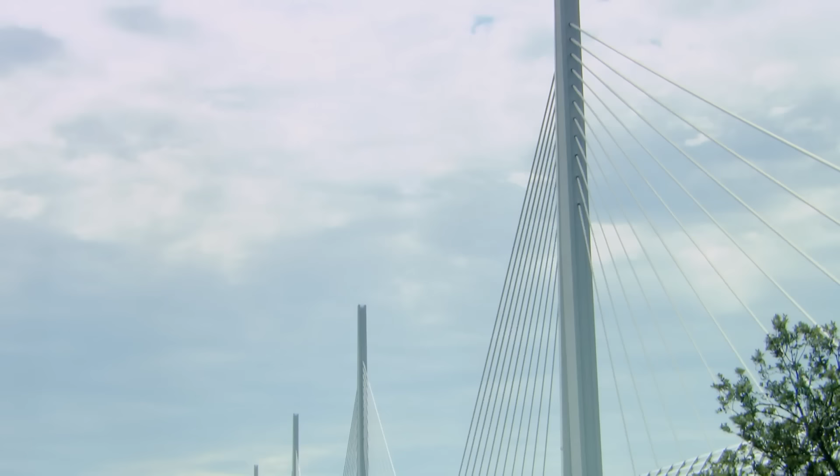The originality of this bridge is that it is a cable-stayed bridge, but with multiple spans. This is really very special. Whereas the Strömsund Bridge has only one central span, the Millau has 6.

So as the 700-ton pylons were erected, engineers had to trust they'd calculated the perfect distribution of rigidity and flexibility throughout the structure.

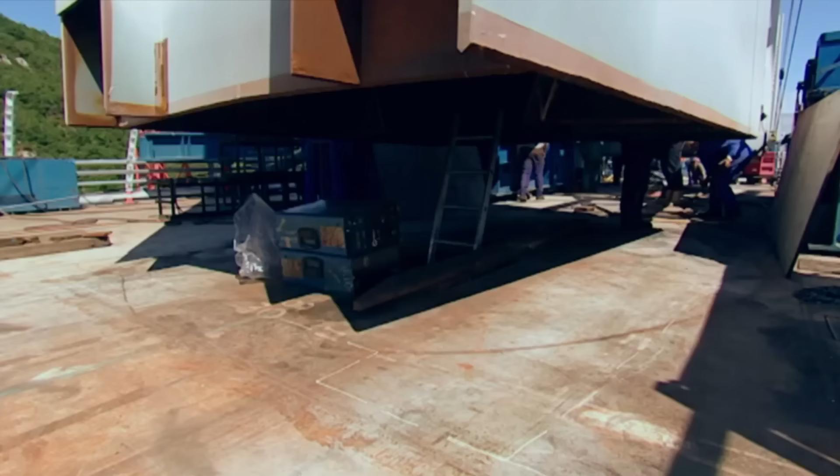Key to its success lay with the cable stays themselves. This is one of the stay cables of this bridge, which provides the necessary resistance. In fact, for each of the 7 pylons, we have 11 stay cables on each side, so 22 per tower.

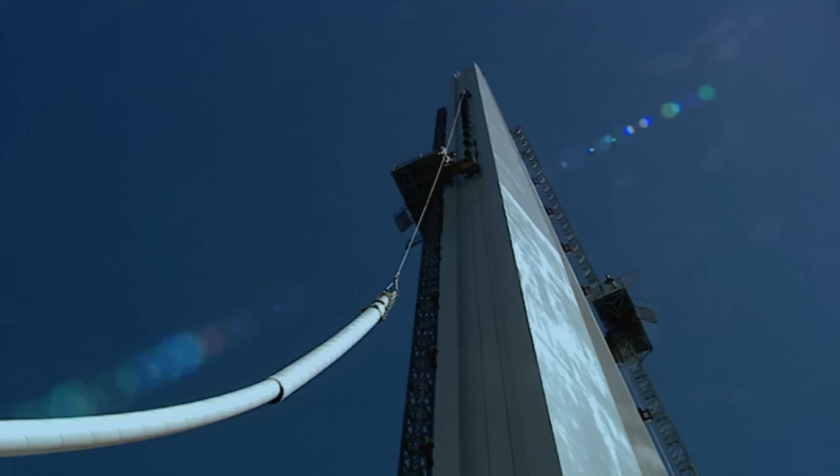The strongest cables are made of 91 steel strands and have the breaking strength of 2,000 tons. These cables are more resistant than ordinary steel, and this is why stay cables are extremely efficient to design very long spans. They're so strong, engineers installed just a single axis, and only when tensioned did the entire bridge become rigid.

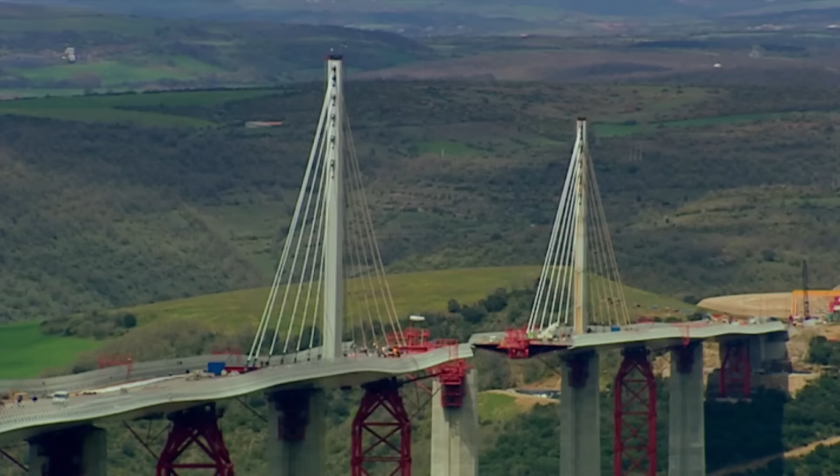After little more than 3 years of construction, the integrity of the bridge could now be tested. 28 trucks, weighing a total of 900 tons, were driven en masse to the center. The deck flexed, but only a few centimeters, and the bridge remained firm.

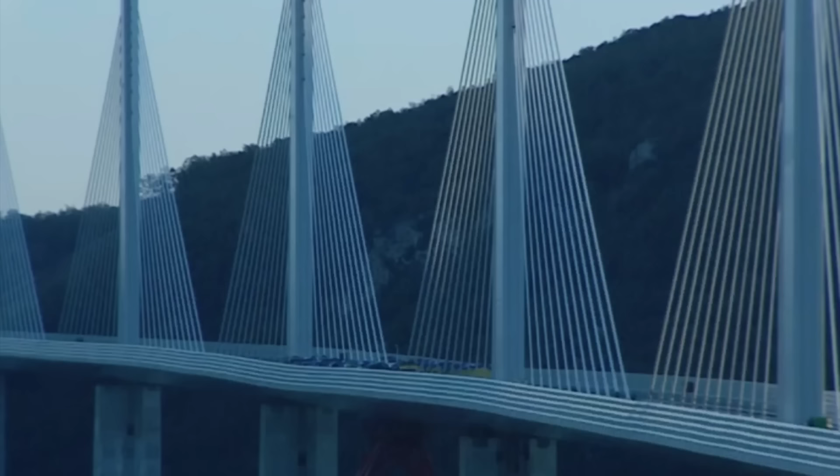Today, I'm of course extremely proud because there are many steps in erecting a bridge like this. Finally, when the bridge was completed, it was an enormous success.

Opened in December 2004 and finished 2 months ahead of schedule, the Millau Viaduct marks a significant milestone in bridge engineering. Now used by nearly 5 million vehicles each year, for engineer of the Millau Viaduct, it represents the achievement of a lifetime.

You know, when you have passed years working and fighting for a bridge, and that suddenly it's finished, there is really a moment where you don't know what to do.

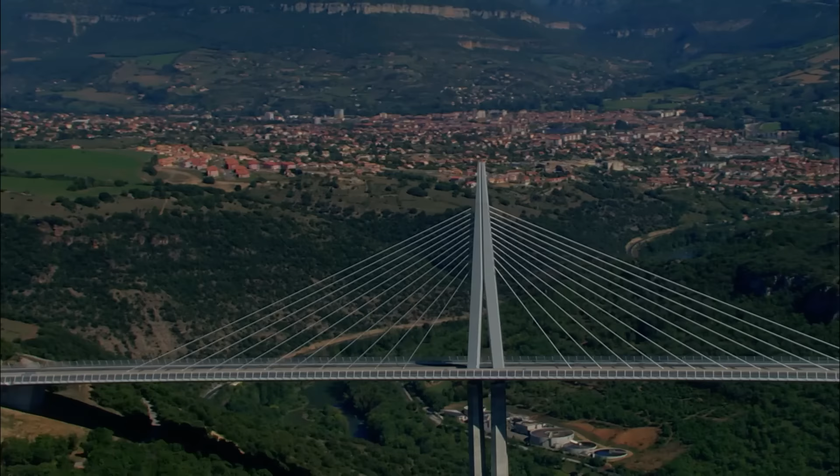By learning from the great pioneers of the past, adapting, upscaling, and making innovations of their own, engineers and designers succeeded in making the impossible possible.

Many thought that it would be impossible to build that bridge, and now it is there.